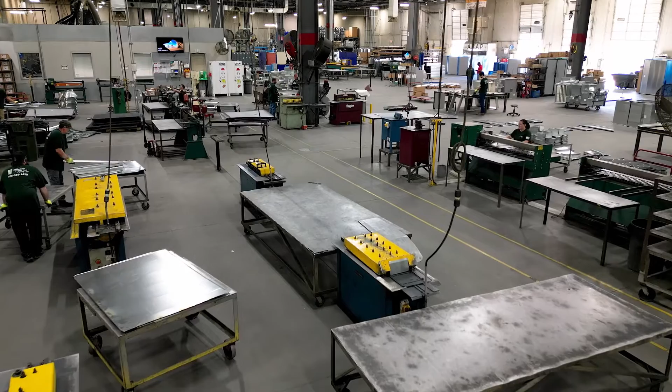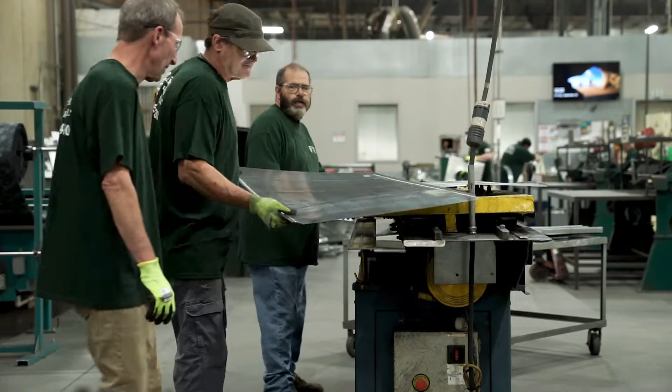For an HVAC duct and fittings fabricator, gaining efficiency in the fittings fabrication area of your shop is critical to improving profitability. In this series of videos, we'll examine some strategies, from automation to shop floor layout to specific machines that can help you maximize the productivity and profitability of your fittings fabrication operation.

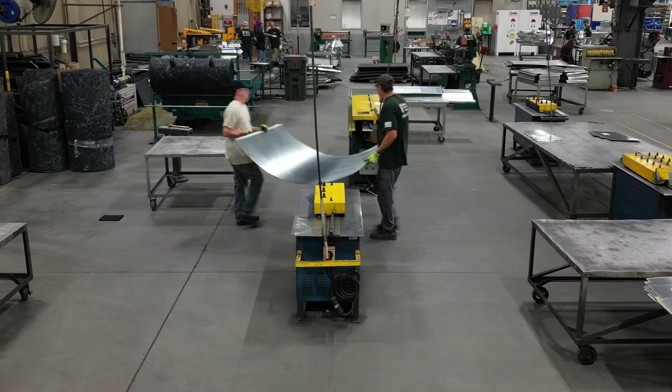In a square fittings fabrication operation, gaining efficiency is not just about purchasing the latest automated machinery. In order to capitalize on your machine investment and increase your profitability through productivity, your shop floor layout is critical for success. In this video, we'll take a look at one setup designed to maximize efficiency.

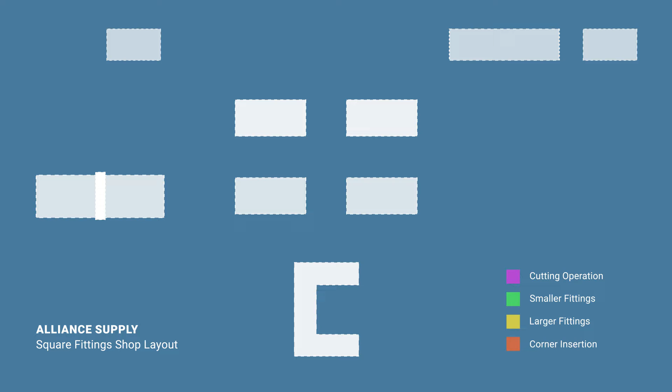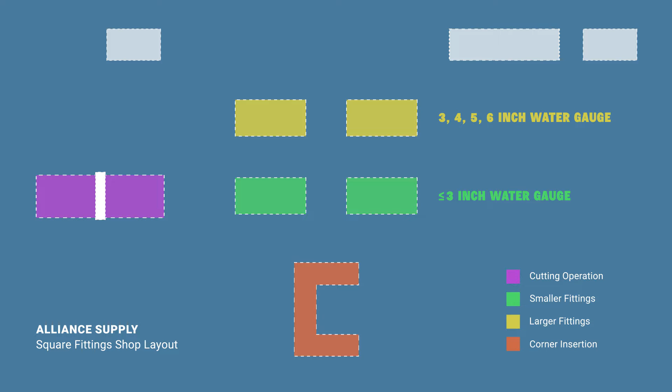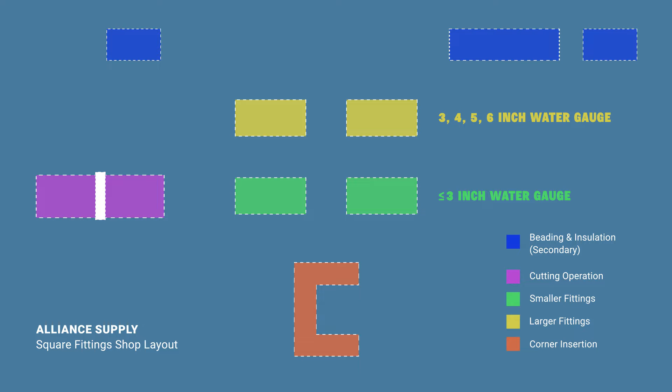The backbone of your square duct fittings operation includes the following. 1. Cutting operation. 2. Operation for smaller fittings, utilizing lighter gauge materials for lighter pressures. 3. Operation for larger fittings, utilizing heavier gauge materials for higher pressures. 4. Corner insertion. Beading and insulation are also important operations, but since they are not required in all jobs, they can be thought of as secondary from the standpoint of the flow of material.

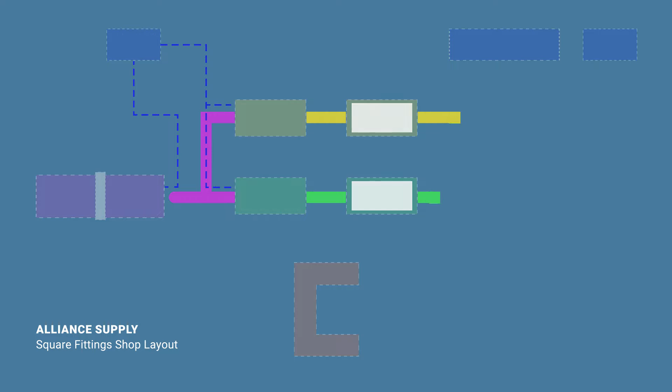The key is to align these operations in an uninterrupted, logical workflow that minimizes the distance that materials will travel and the accumulation of work-in-progress inventory while allowing for sufficient room for each process. Of course, this will be different in every shop, given the square footage of the facility, the available machinery, and the volume of product that is manufactured.

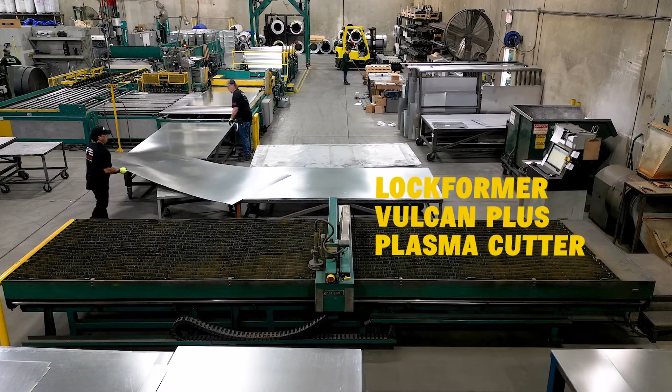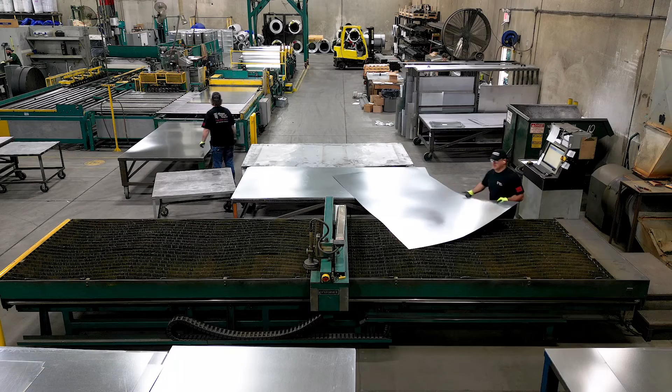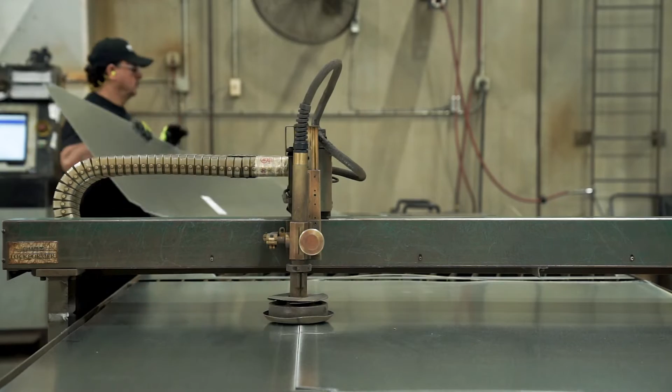At this facility, the fittings fabrication area starts with the plasma. They're using a Lockformer Vulcan Plus sheet metal plasma cutting system, featuring a 20-foot table which provides a couple of distinct advantages. As shown in this operation, the plasma can be sheet-fed. In this case, they can load two 10-foot blanks, flat, as seen, or beaded, which gives the operator the ability to pick up cut pieces on the front of the table while the plasma continues to cut on the backside of the table, so it's always in production.

This machine can also be coil-fed by an Iowa Precision coil feed, with an optional beading unit to optimize how much can be cut from a full 240-inch length of material, while still allowing the operator to pick up cut pieces on the front while the plasma continues to cut on the back.

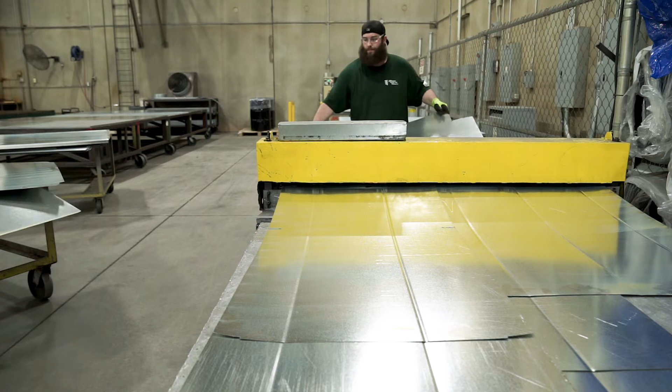From there, this shop has added a secondary beading operation for those jobs where the duct is exposed and the beads have to line up. The beading machine is installed in line with the subsequent operations, but offset enough so as not to disrupt the flow of material when beading is not required.

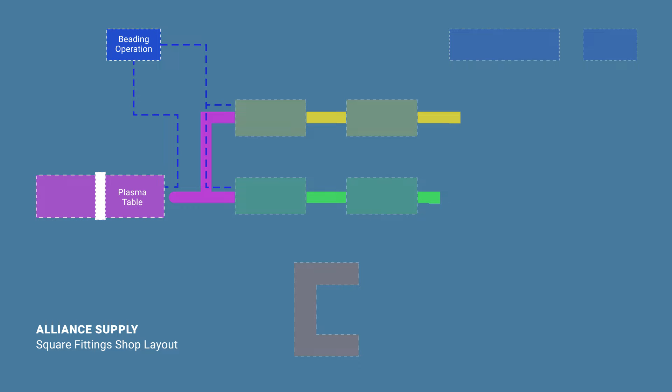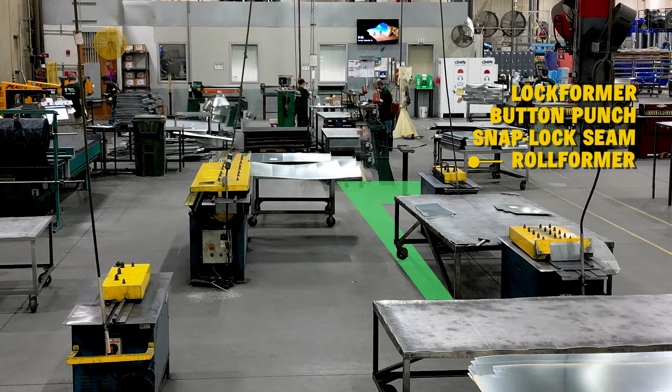At this point, the operation splits into two parallel paths, depending on the type of job. Path 1 for smaller projects calling for smaller fittings, lighter gauge materials, and lighter pressures includes a cleat former to make the S-cleats and drive cleats. In this case, a Lockformer Triplex cleat former. 2. A Snap-Lock roll former for the male and female Snap-Lock seams. In this case, a Lockformer Button Punch Snap-Lock seam roll former.

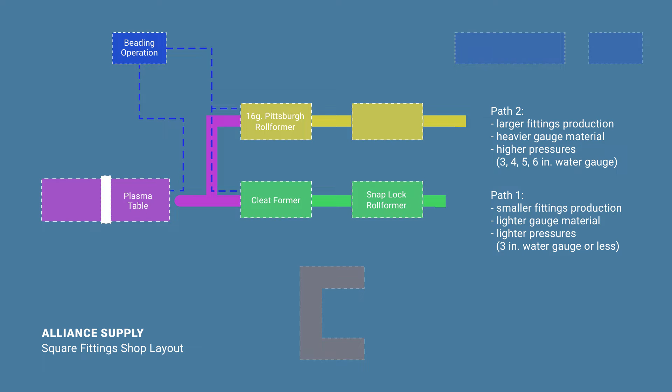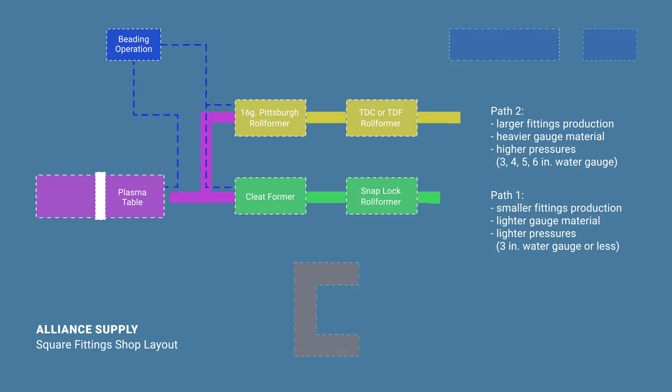Path 2 for larger projects, including larger fitting production, heavier gauge materials, and higher pressures includes a 16-gauge Pittsburgh roll former. In this case, a Lockformer Pittsburgh roll former. 2. A transverse duct connector (TDC) or transverse duct flange (TDF) roll former. In this case, a Lockformer transverse duct connector (TDC) roll former.

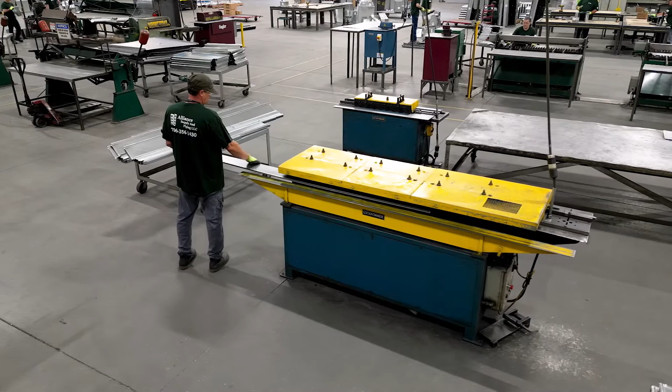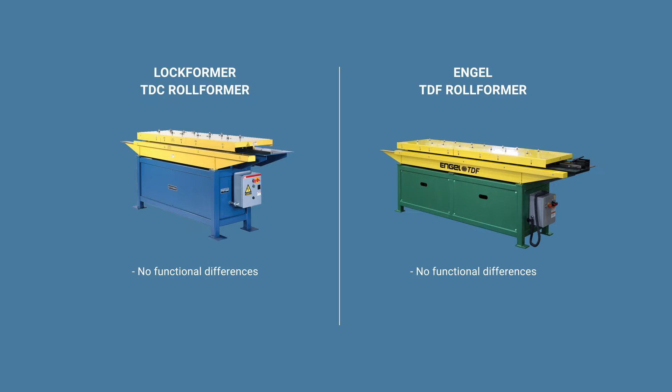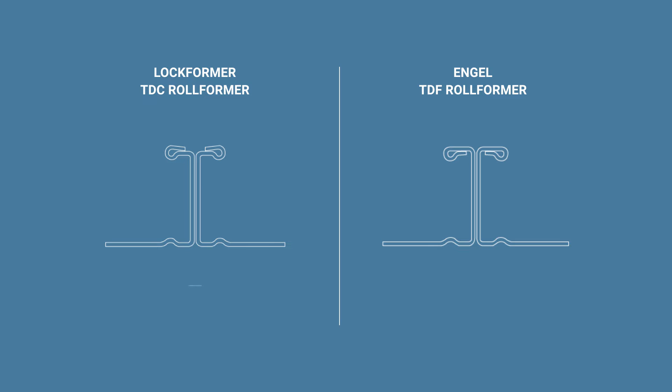This last machine can be a game changer for your operation because it eliminates the manual process of installing slip-on flange connectors. With transverse duct connector (TDC) roll formers from Lockformer and transverse duct flange (TDF) roll formers from Engel, you can roll form your own sealable flanges on transverse duct joints during the fabrication process, eliminating the added cost of slip-on flange. There is no functional criteria difference between the TDC and TDF flange, and both meet the SMACNA T25A and T25B requirements. The only difference between the two profiles is the hem on the flange. TDC hem is on the outside, while the TDF hem is on the inside.

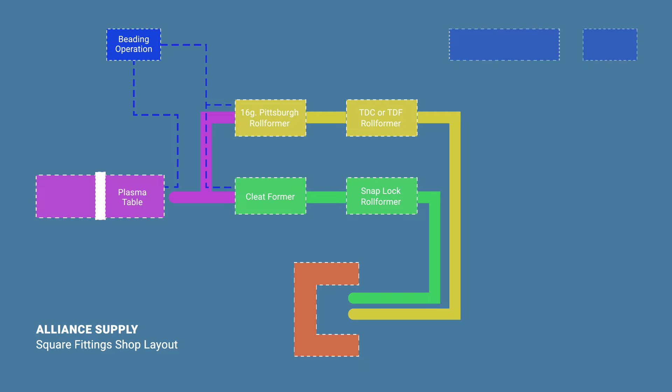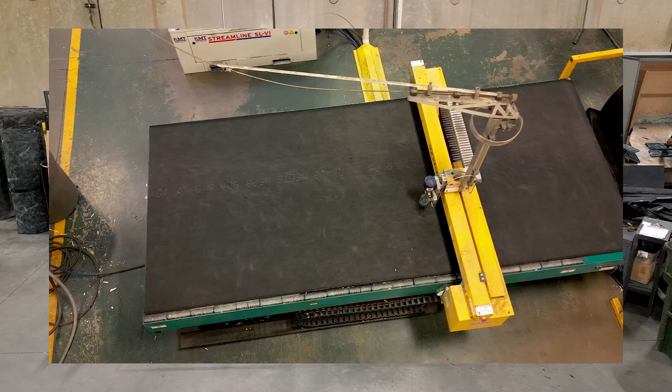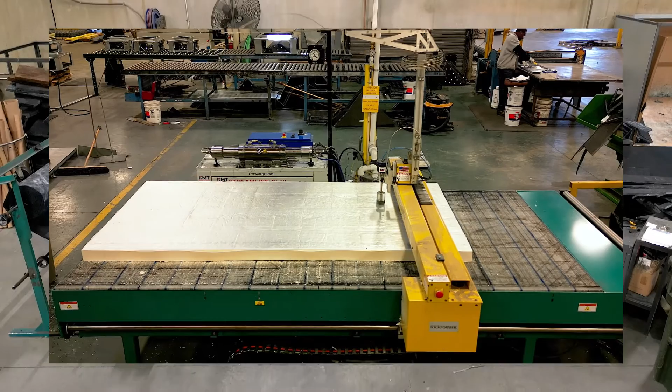From here, many components will head straight to the assembly operation. But since many jobs will require insulation, a secondary operation is needed. For this operation, there are two machines that can dramatically improve your productivity. First is the water jet for cutting the insulation. The advantage of a machine like the Lockformer Vulcan 1600 fiberglass and insulation foam water jet cutting system is its ability to perform cutting with zero scrap factor on insulation up to 4 inches thick at 1200 inches a minute. That's approximately 1/10 the time it takes to cut them by hand.

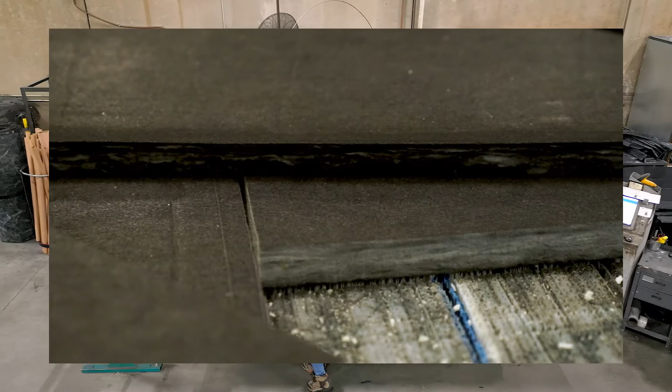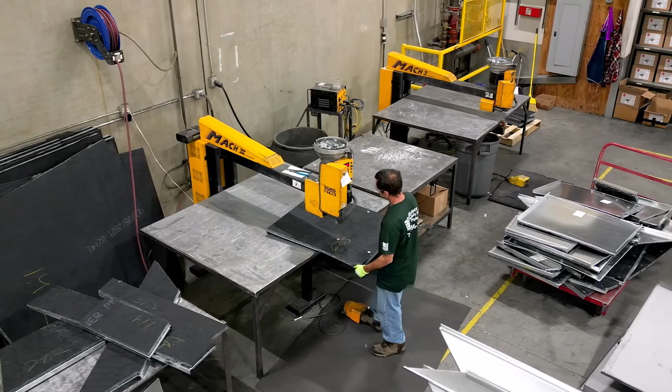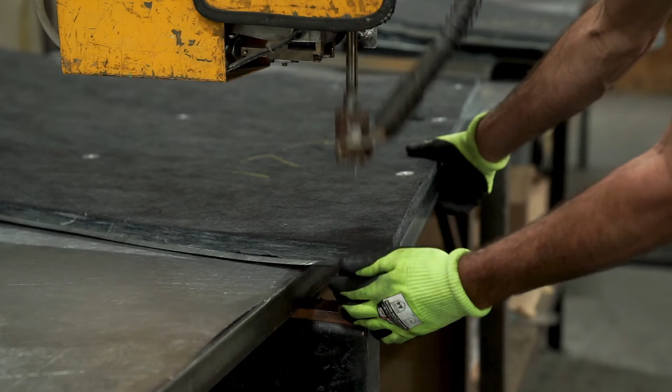This also reduces material waste and provides a very clean cut, so unlike a plasma, there is no scrap between cuts. This zero scrap factor can reduce your scrap by up to 75%. The second machine is the pin spotter, used to pin the adhered insulation with mechanical fasteners to the duct form. One thing to note in this operation is the open space needed to manually rotate the forms to get the fasteners in place and be free of hazards or incoming materials.

Whether you're cutting insulation manually or with a water jet machine, similar to the beading operation, you want the insulation cutting and installation operation to be in line with the preceding steps, but offset enough as not to disrupt the flow of material when insulation is not required.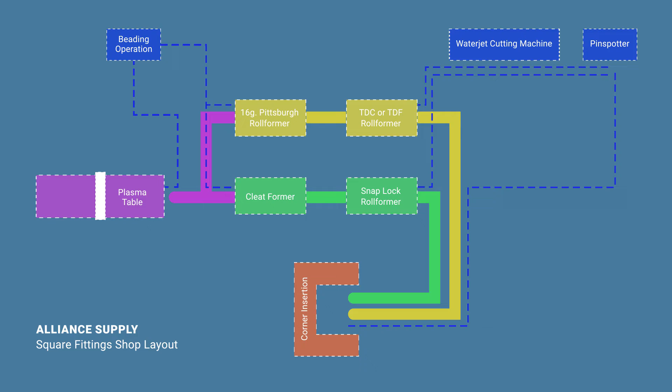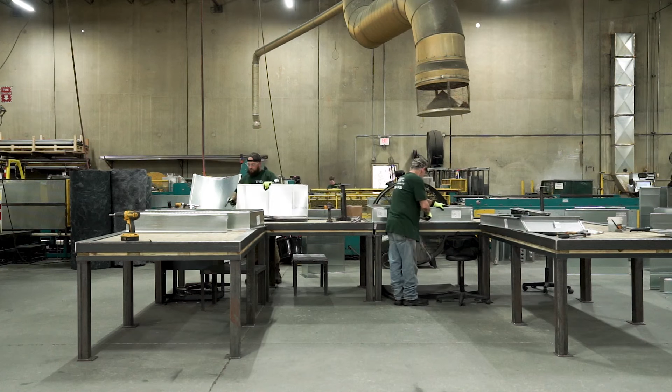From here, it's over to the assembly operation. This area is set up to provide an ergonomic workspace with high tables that provide the worker with a proper range of motion to not only prevent wear and fatigue, but also to keep the process moving without physical or procedural setbacks. As with many operations in this facility, corner insertion is done by hand.

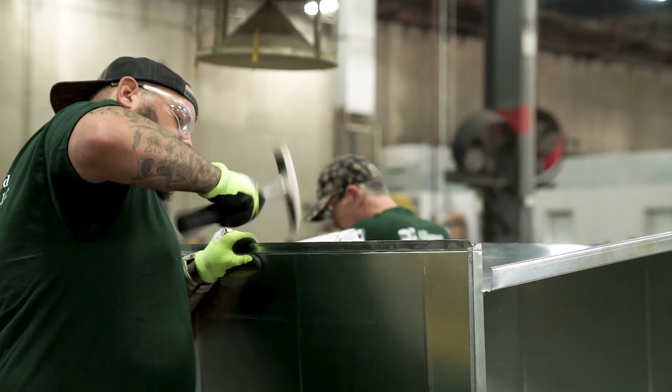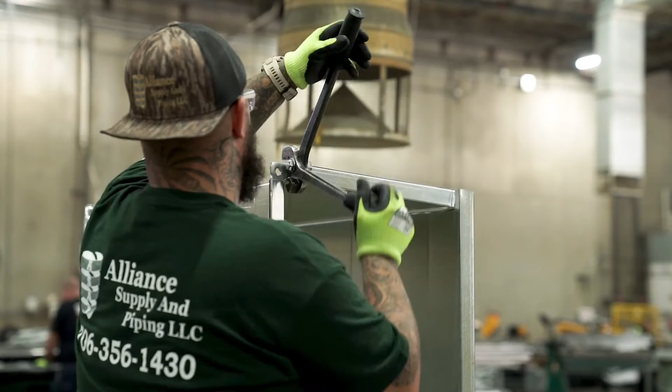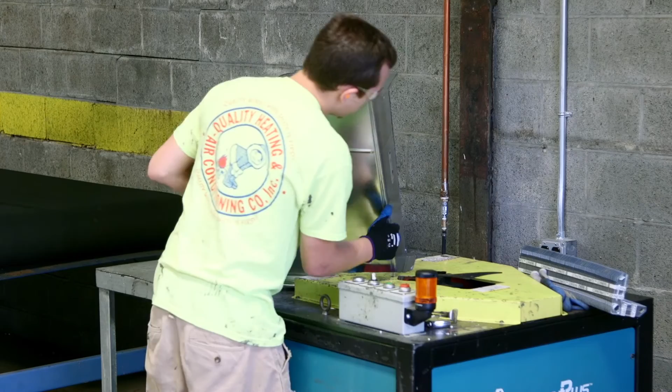This manual process is not only slow and labor-intensive, but also inefficient and imprecise. Corner insertion can bottleneck the entire fittings operation, negating any productivity gains that were made upstream in the process. This is where the Iowa Precision Cornermatic Plus corner insertion machine can speed up the process while ensuring a factory seal and eliminating the physically demanding process of manually hammering in corners.

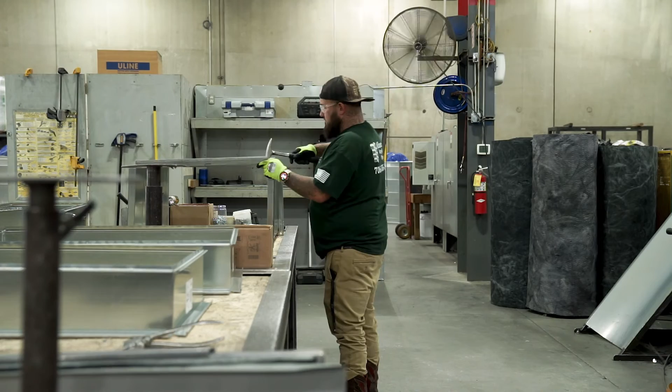As you continue to look for ways to maximize the productivity and profitability of your entire operation, taking a hard look at improving your fittings fabrication area is a critical step. Of course, every situation and shop is unique, and there are many factors that impact success, from your available square footage to your existing layout, from your current automation machinery to your budget or need for new equipment, and, of course, your goals for improvement.